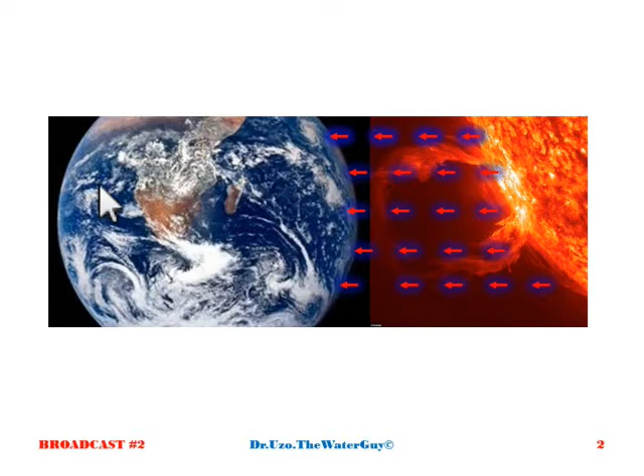Speaking of the sky, the natural processes begin with the sun, which generates the energy that not only sustains planet Earth, but also drives a phenomenon we refer to as the hydrologic cycle or water cycle. This cycle involves a number of complex natural phenomena with a basis in physics and biochemistry, which we're not going to delve into in this broadcast.

But in a nutshell, it involves the generation of water vapor from the surface of the earth due to the heat of the sun, and then the rise of that vapor into the atmosphere, which coalesces and condenses until the weight or density of water in the cloud formed is such that it cannot be supported by the atmospheric pressure, and it then falls back to earth as precipitation that replenishes the streams, rivers, lakes, and reservoirs, and of course the massive global oceans.

The main sources of these vapors are the open ocean and the open lakes, rivers and streams through the process of evaporation. Then the vegetated portions of the landmass of the earth, which generate water vapor through the leaves of plants, shrubs, and trees through a process called transpiration. Both processes combined, referred to as evapotranspiration, account for most of the vapor that goes up in the skies and forms rain clouds.

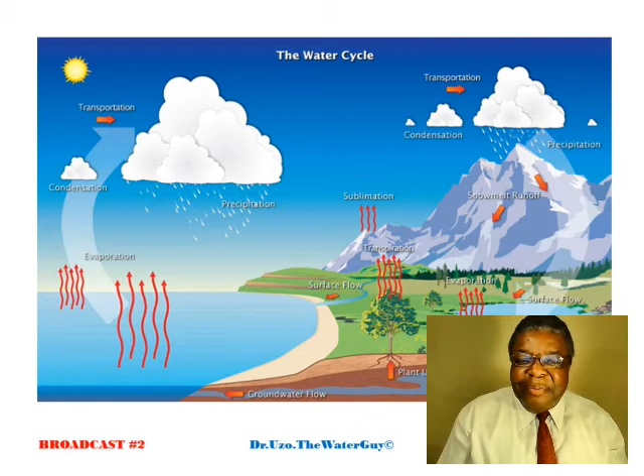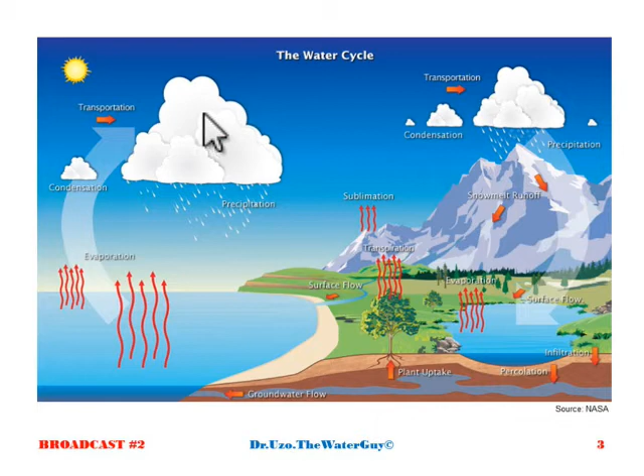So anyhow, the cloud that forms from this water vapor, from these various sources, condenses and comes back down as precipitation that replenishes our streams, rivers, lakes, reservoirs, aquifers, and the massive oceans of the world. When you look up in the sky and see those beautiful creations of nature, you should also think about it as something being put in storage, a valuable resource that will sometime shower upon us and replenish our water resources.

When you look at it like I do, don't just behold the beauty of it, but consider it as something that has in storage a valuable resource, water, that sooner or later will shower down upon us and bless our globe and replenish our water resources. These clouds come in different forms and shapes, with the same physical nature, water content, that sooner or later will come down and replenish our earth.

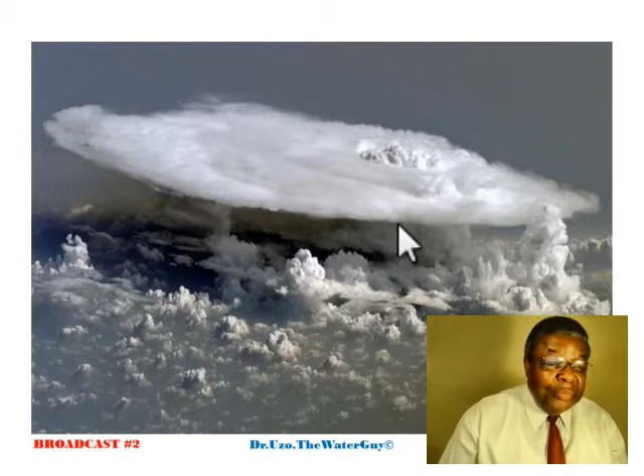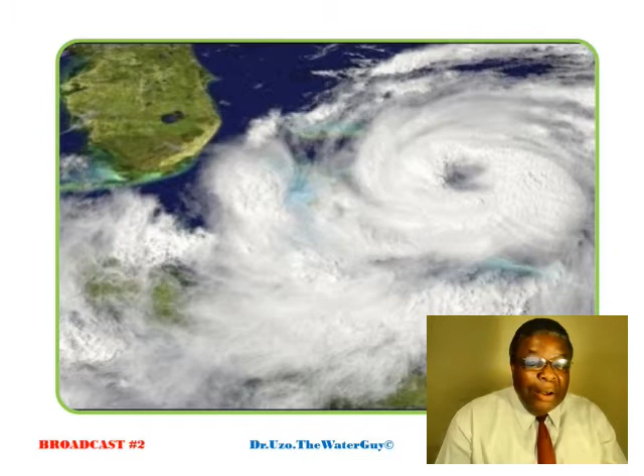Even a dark and ominous looking cloud like this has the same thing in it, the same resource in it. And even though this may result in heavy downpour that may cause some problems, yet it is delivering something that we need so desperately. That manner of delivery may even be violent, like a hurricane, a typhoon, a cyclone, a tornado. But we should learn to recognize these violent weather events as nature's way of trying to strike a balance and reach a state of equilibrium.

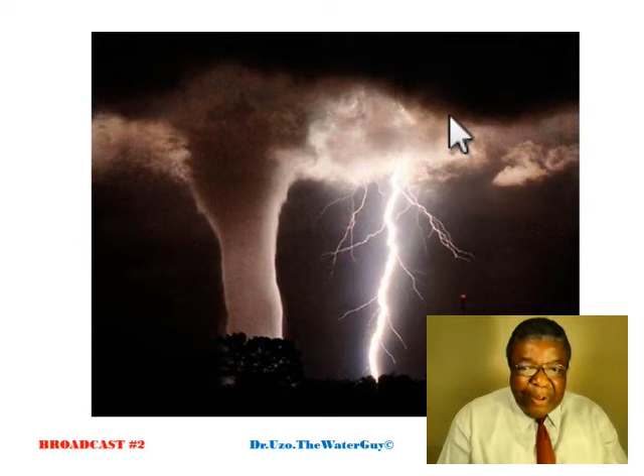And so all we need to do is take care of ourselves and learn to live with those violent events. They are temporary in nature, and we should appreciate what nature is doing to try to balance the various catastrophic atmospheric forces in play in these violent events.

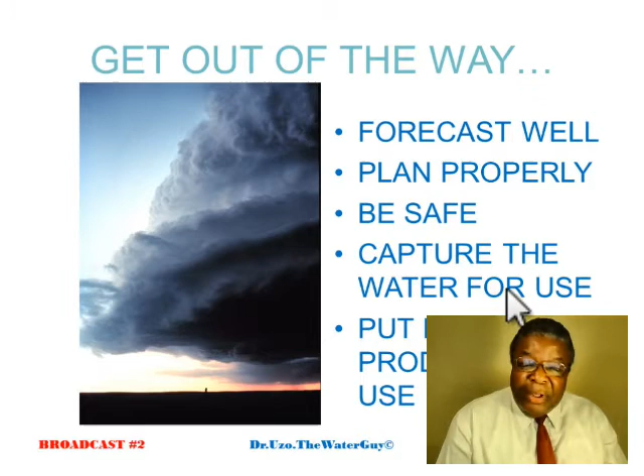All we have to do is be sure to forecast those events well and plan properly for them ahead of time. Be safe, get the citizens out of the way, and make every effort to capture as much of that water as possible for our use, and put all that water to productive use, including supplying them to homes.

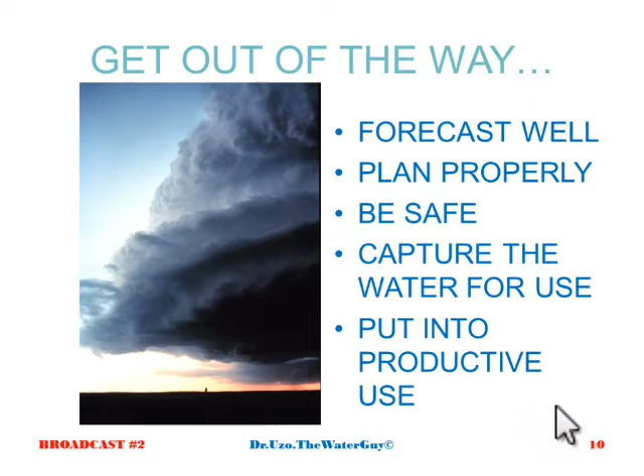And so for anybody watching this broadcast, I urge you to maybe adopt a new attitude to that inconvenient snowstorm that made it difficult for you to commute to work or drive, or that heavy downpour that interrupts your daily activities, even a catastrophic event like a flooding event like this.

These are transient, temporary conditions that, like I said earlier on, can be planned for with the right forecasting methods and the engineering and town planning that will keep things out of the way and enable us to receive the blessings of nature. Because ultimately, these transient conditions will go away,

and then a state of equilibrium will finally be arrived at, a state of balance, the calm after the storm, when all the precipitation have drained into stream channels and start to flow down the channels in a more peaceful condition, and maybe even a cliff like this, a cliff face like this, to create this type of wonder of nature, beauty of nature.

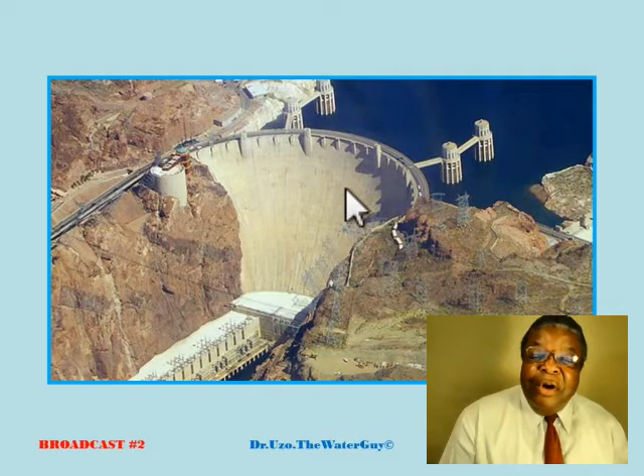And the stream flows on and may even end up being captured in a marvelous engineering structure like this, where man-made process begins, actually.

And indeed, that's the stage at which man-made processes come into the picture, where hydrologists, water resources engineers, civil engineers, structural engineers, geotechnical engineers plan, design, and oversee the construction of an amazing structure like this, a dam and a reservoir that will hold the water coming down the rivers and streams for supply to your home.

And let's not forget the portion of the precipitation that infiltrated into the ground to replenish the aquifers. There's geologists, hydrogeologists, engineers design wells and pumping systems to extract that water and pump it up to add to our supply reservoir.

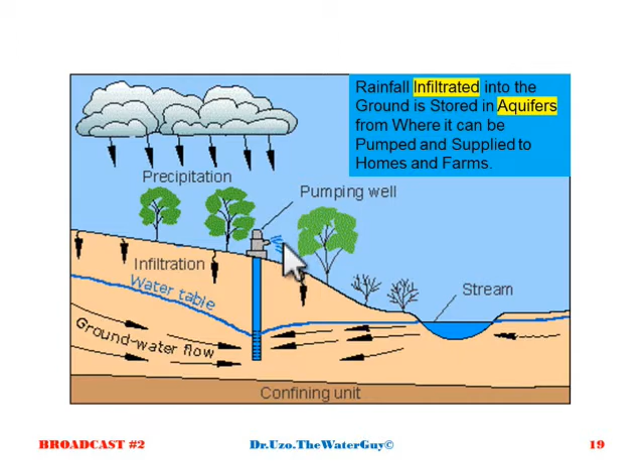Well, the mention of extracting groundwater calls, of course, our attention to a very important aspect of water resources infrastructure, which is water wells. In a lot of regions of the world, groundwater is a primary source of water supply. And for that reason, in future broadcasts, I would devote one or two broadcasts to the subject of water wells.

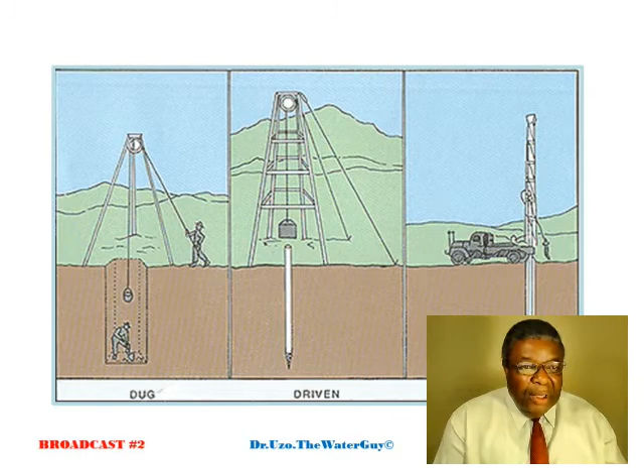And another system is driven well, in which a bit and a screen attached to the end of a pipe string is driven into the ground below the groundwater table, and then water will run into the well through the screen here, and it's pumped out.

And then, of course, drilling, which the drilling rig comes in different sizes, but it's a technology for drilling deeper than 1,000 feet in cases where massive production of groundwater is required.

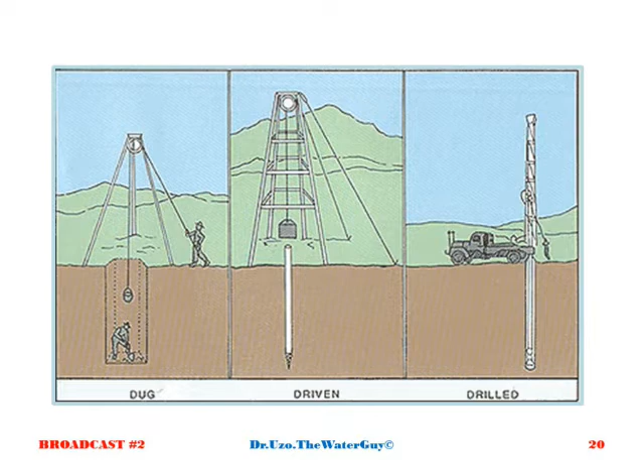So from this point on, we're going to talk a little bit more about the man-made processes and the supply chain and the supply train of water. We have talked about the natural processes and some man-made processes involved in getting the water into a supply reservoir or a pool or even an aquifer.

Now, the moment precipitation hits the surface of the earth, that water is immediately susceptible to pollution, contamination. So regardless of what part of the world you are located, your water typically requires some level of purification or treatment.

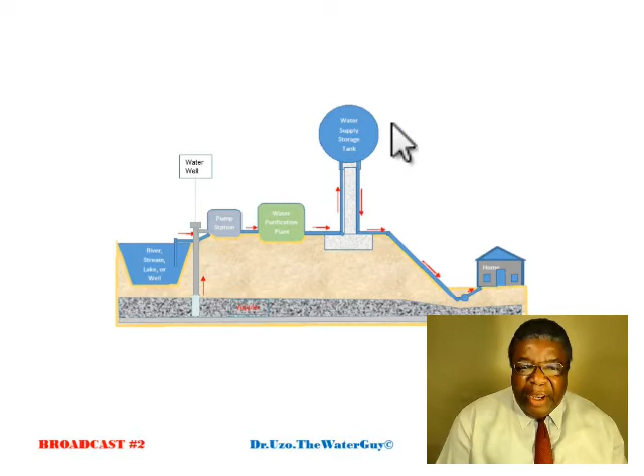So the next phase in bringing water to your home is pumping all that water to a treatment plant. The nature of that treatment plant is determined from sampling the water, performing general chemistry tests on the sample, and determining what chemical constituents and pollutants are in the water.

That information is used to select an appropriate treatment or purification technique. The subject of treatment and purification of water supply is very important, and water supply agencies take it very seriously. Governments have enacted laws ensuring safe chemical levels are maintained at all times, so water supplied to our communities is clean and safe to drink. For that reason, I'll mention just a few common methods of purification, though they don't always apply to all water supplies - it depends on the water chemistry of your source.

I'll start with filtration, which is commonly used in many supply chains. It involves passing the water through selected media to remove suspended solids and sometimes coloration in the water.

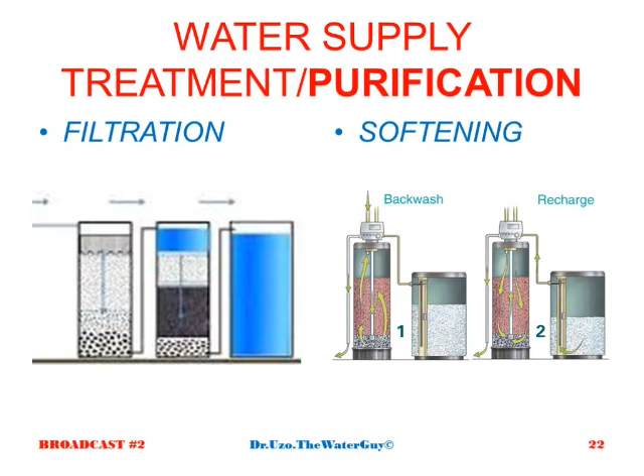The other method is chlorination, which is basically disinfecting the water to kill bacteria and other pathogens that may be present, to make it safer.

Occasionally, in regions where the water chemistry still has the potential to cause dental problems, fluoridation is put in place. This involves adding fluoride to fortify the water supply, which deals with dental problems associated with drinking water.

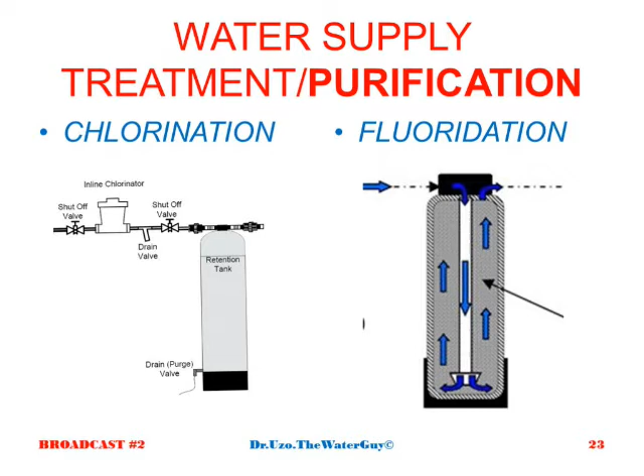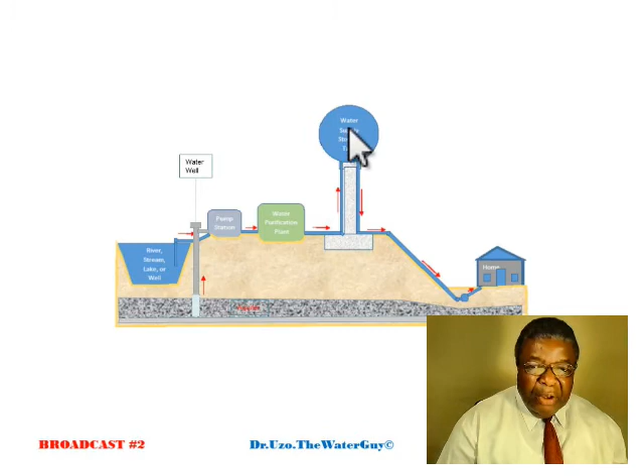So with appropriate and sufficient treatment given to the water supply, the treated water is pumped up and stored in an above-ground storage or reservoir, from where it can be supplied through gravity flow to the subdivision and to your home.

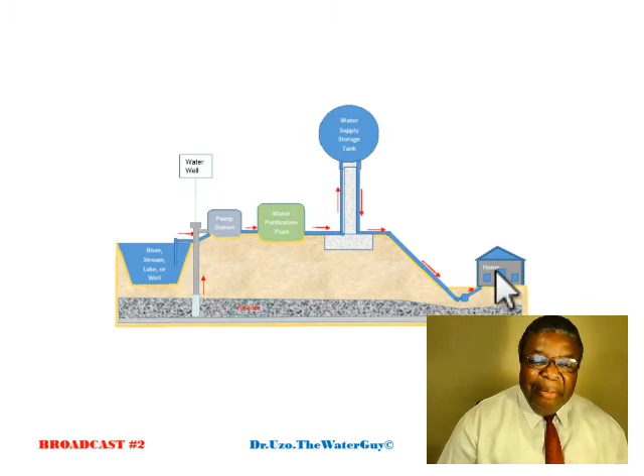This usually involves constructing a massive tank like this, placed on the highest elevation in the community - I'm sure you've seen one of these structures while driving through your community. Where it's not possible to build it on high ground, it's suspended on a steel structure like this to give it elevation.

This is like a bank for at least a reliable water supply for a period of time. Different agencies will have different sizes depending on the period of reliability they want to build into their system. In a lot of places, it's like a 2-week supply; other areas may have a tank that can supply a community for up to 1 month.

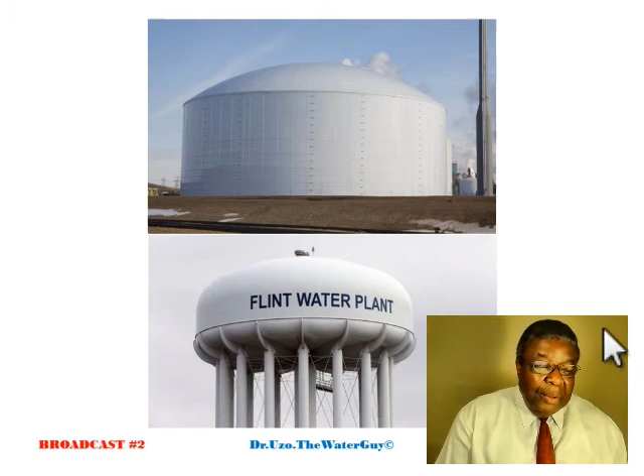But the idea of placing the reservoir or tank at a high elevation, above the community where the water is supplied, is to create what is called a head. A head is an elevation high enough that the weight of the water at that elevation enables it to flow through the pipe network, overcome the friction involved in flowing through those pipes, and still have sufficient pressure to go through the plumbing in homes and flow at the right flow rate.

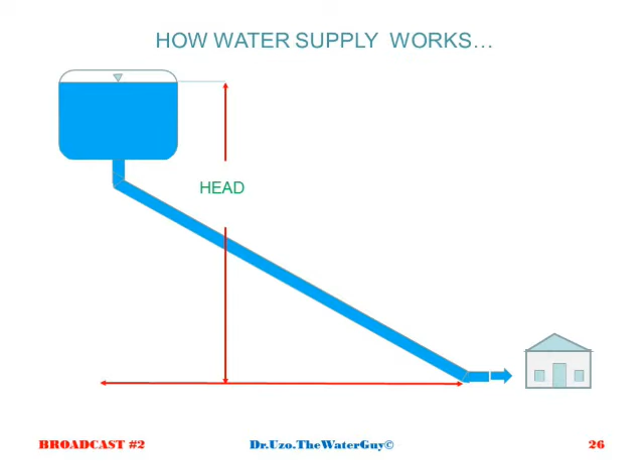Here's another way to look at it: this head is the difference in elevation between the tank location and the location of the tap in your home. This difference in elevation gets the water to your home by gravity flow, at the right pressure and the right flow rate.

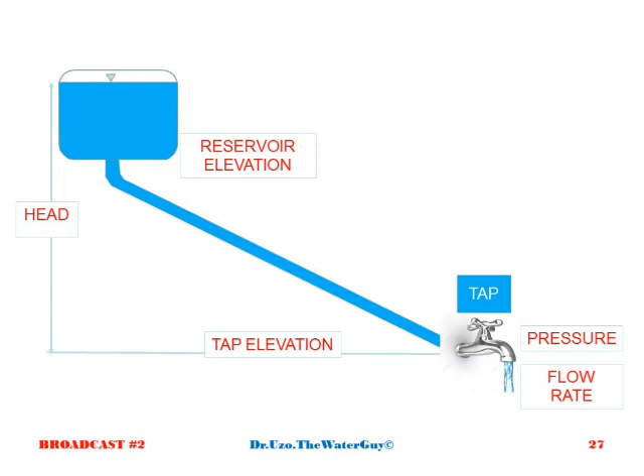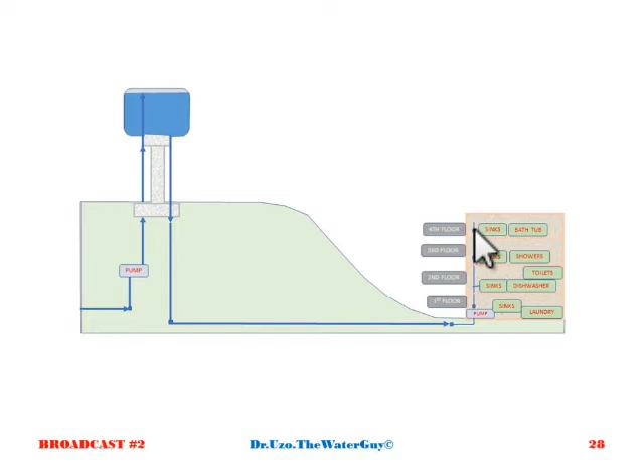Even in a high rise, these factors are taken into consideration in the design of the size and elevation of the tank. Only on rare occasions, if the pressure isn't sufficient to push water to the top floors at the right pressure and rate, will there be a need for an auxiliary pump at that building location to ensure enough pressure to reach the top level.

But let's not forget that another significant component of the water supply infrastructure is the pipe from the reservoir to the community where the homes are located. That part involves significant cost and effort to excavate and lay down the pipes, sloping them down to the communities where the supplies are needed.

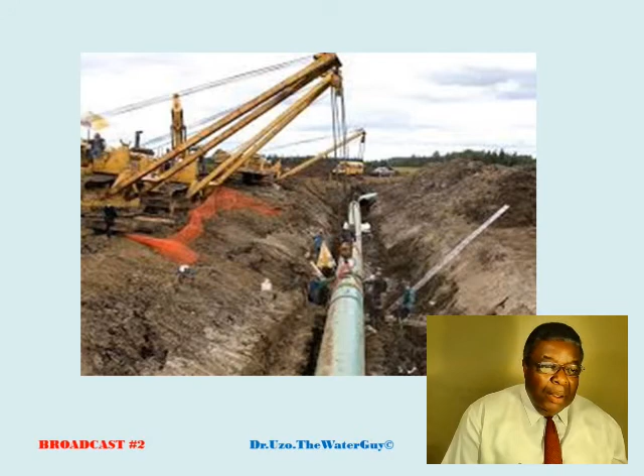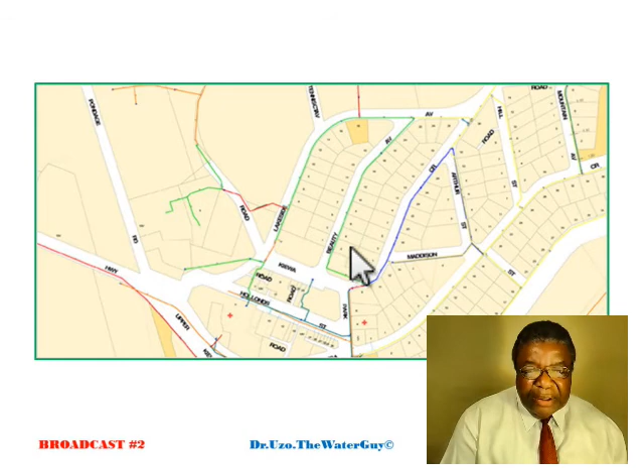If you go to a water agency that supplies your water, they have what's called the Atlas map, which shows a map of the communities they supply and the lots within the subdivision. Every single lot has its own independent service line. So the pipe comes from the reservoir and it's laid down in every street, basically.

Not all the time, but such that there is ease of connection of a service line from the main line to the lots or to the homes. So this map here shows, in green, some in red and in blue, the alignment or configuration of the water supply lines that run through the streets within the subdivision.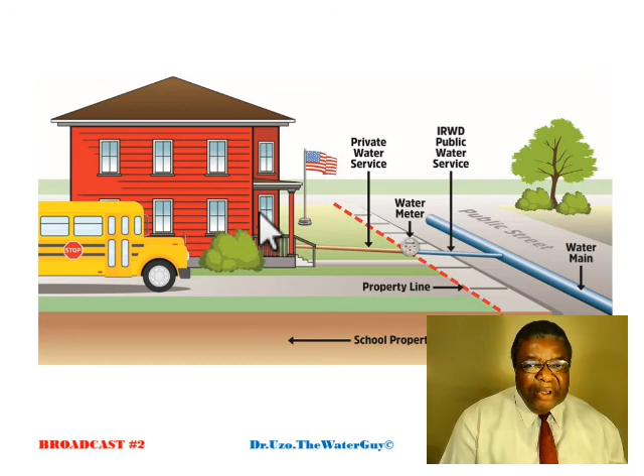Then your responsibility, or the responsibility of your building contractor or the developer that sold you the house, is to install this private service line and all the plumbing within the building that goes to the different points of use.

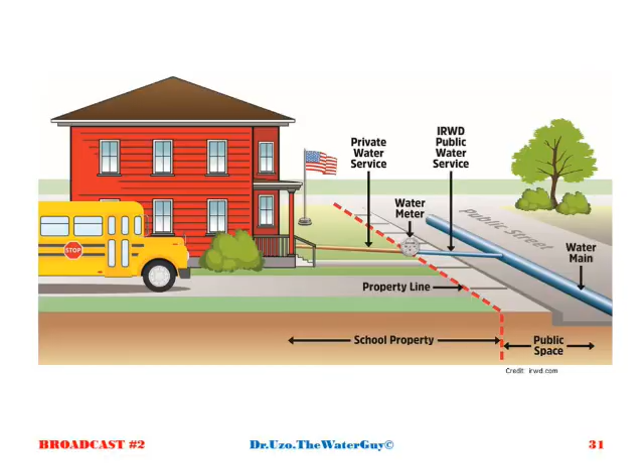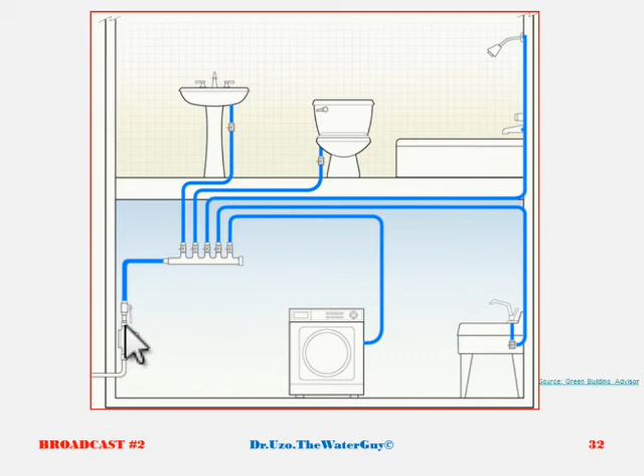So what you see is, for example, here's that private line from the meter, installed with these connections by the plumber, the developer's plumber, or the homeowner's plumber, and it goes to the different points of use: the laundry room, the sinks, the toilet, bathtub, any drinking fountain, the kitchen area, and even in some cases the lawn areas.

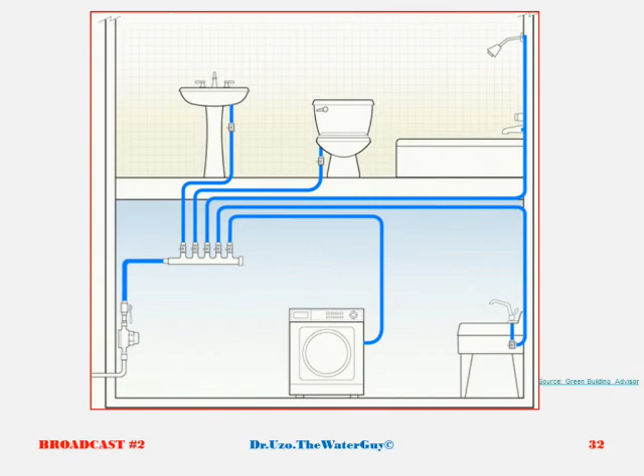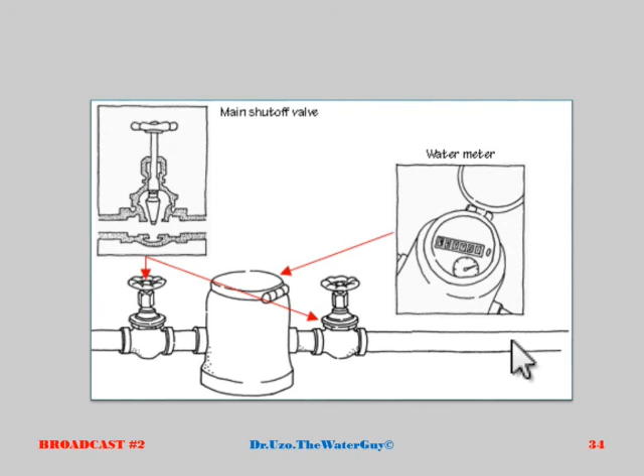This distance is usually more than 10 feet, 15 feet or more, because this line takes it to the property line, and that's where the meter is located. After the meter is the private line that goes to the homes. And if you go back to the street again, this is the meter box. It's located, again, at the location of the meter, which is at the property line.

I guarantee you, if you go out in the street, you will see this structure, and if you pop it open, you will see the meter inside of it. Beyond the meter, again, is the private service line that leads to this wonderful picture here. And that brings me to the point where I tend to say that it is such a blessing to have something like this.

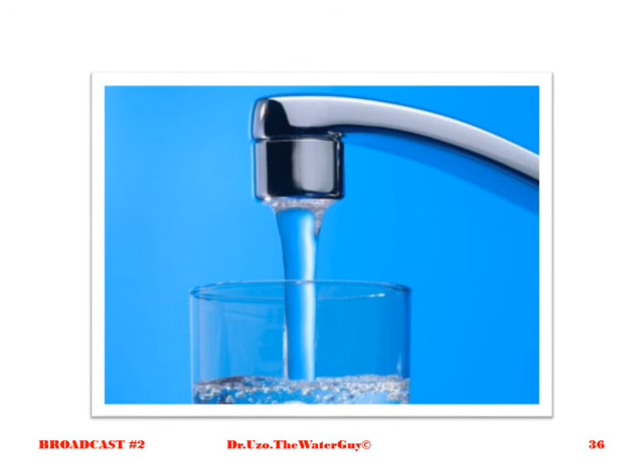Access to safe, clean drinking water is invaluable. Safe, clean drinking water is so crucial to our well-being. Water sustains our health. And I encourage you, the viewer, to take advantage of this blessing and the fact that it's also good for you to drink it up. So many people around the world don't have that luxury. Take advantage of it while you have it. It's good for your health.